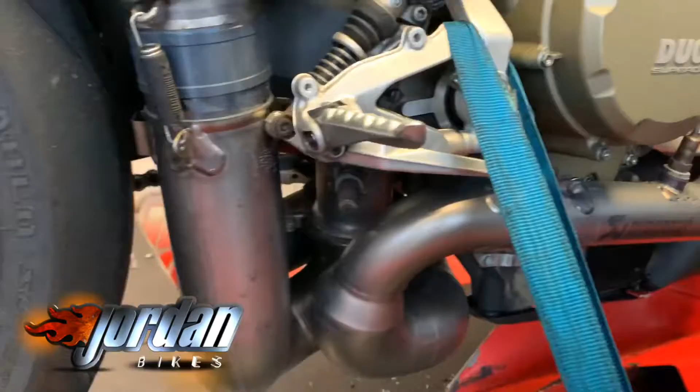Josh here at Jordanbikes in Leeds, and this morning we've got this 2012 Ducati Panigale 1199. As you can see, it's fitted with this lovely Akrapovic full system, which was once fitted to Chaz Davies' World Superbike. It's been in for a full ECU remap, so we'll do the final run now, and then talk through everything we've achieved.

Bet that's broken my bloody microphone again.

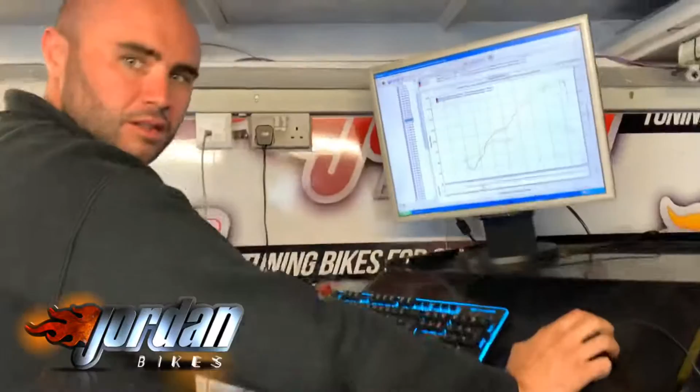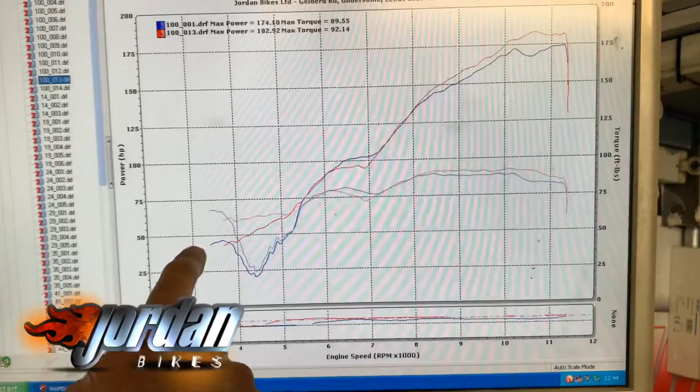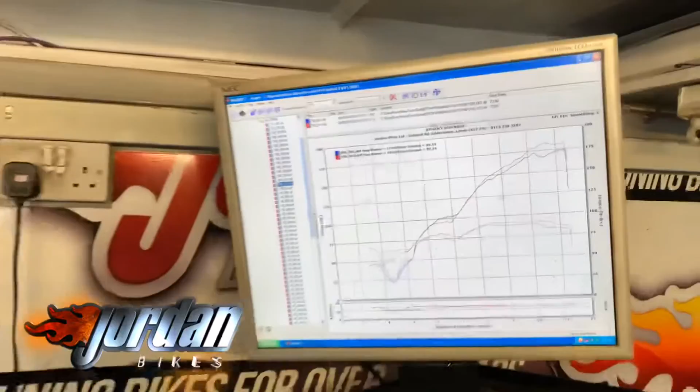Right, so we did the base run this morning. We had 170, just over 174. The biggest thing with this bike is this area here - it just did not want to set off, between 4,000 and 5,500 revs. The blue line is before, and the red is now. This is to do with the fuel that's in the map already - this is the Ducati map that was in. Basically all we've done is sort the fueling out, and it's made the acceleration so much smoother below 5,500 revs, and that's carried all the way through the rev range right up to the top end, as you can see there. It's just got just short of 183 brake horsepower, so that's very, very good for an 1199 model. That's at 100% throttle.

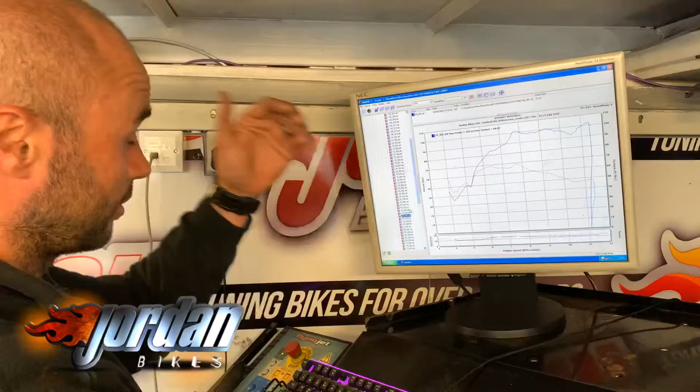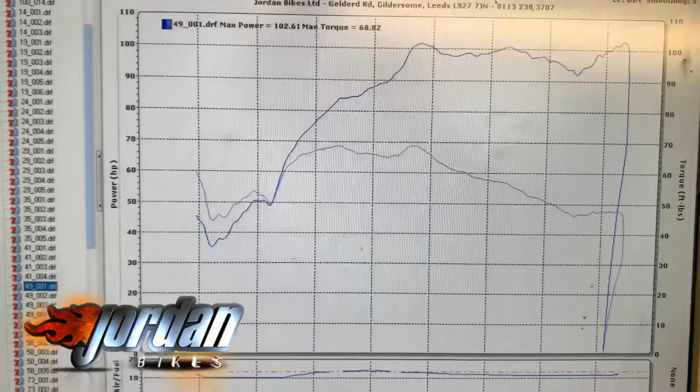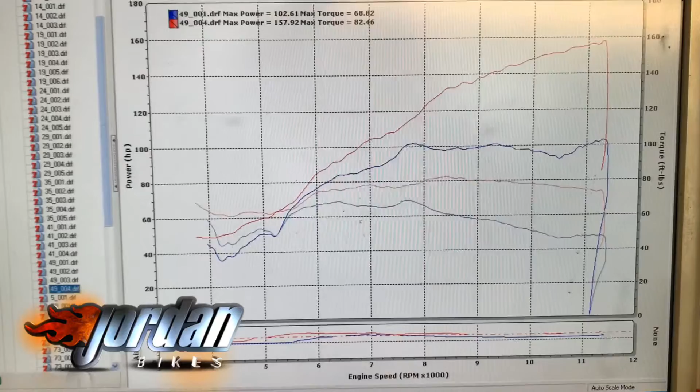So I'll just show you the difference with this map at 50% throttle. This is when it came to us with the Ducati map in it - 102 brake horsepower, fueling absolutely terrible. Then we've changed the fuel and ignition, the electronic throttle valve, and that is it now. It's gone from 102 to 157, so 55 brake horsepower difference. You can just see the increase between the blue and red lines there, right from 5,500 rpm. It's smoothed out again this area here that I mentioned before - that was the main area of concern with this bike.